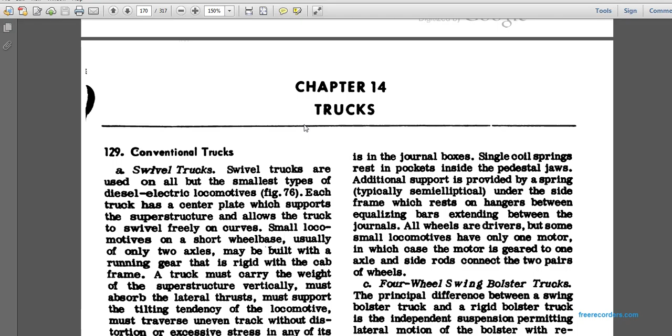129, conventional trucks. Swivel trucks are used on all but the smallest types of diesel electric locomotives. Each truck has a center plate, which supports the superstructure and allows the truck to swivel freely on curves. Small locomotives with a short wheel base usually only have two axles, may be built with a running gear that is rigid with the cab frame.

The truck must carry the weight of the superstructure vertically, must absorb the lateral thrust and support the tilting tendency of the locomotive. It must traverse uneven track without distortion, torsion, or excessive stress in any of the members, must carry the brake rigging, and must carry the electrically driven motors. Many different types of trucks have been designed to meet the great variety of conditions.

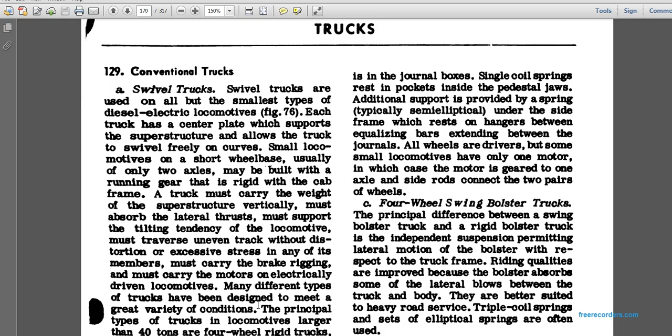The principal types of trucks for locomotives larger than 40 tons are the four-wheel rigid truck, the four-wheel swing bolster, and six-wheel swing bolster trucks. In all types, truck bolsters have the center bearing with a renewable plate that mates with the body bolster to carry the superstructure. Side bearings, with renewable wear plates mounted between the underframe and truck frame, limit the tilt of the superstructure.

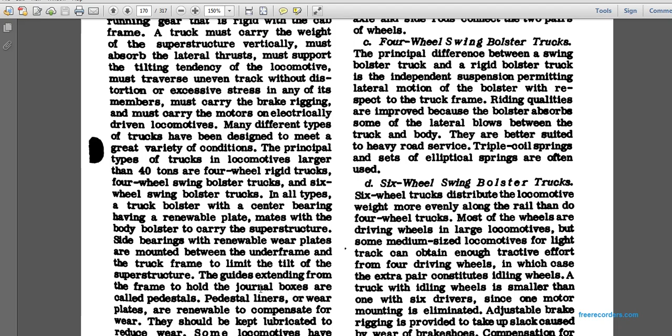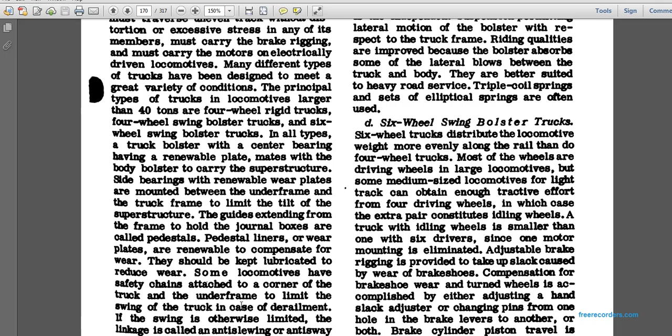The guide extensions of the frame that hold the journal boxes are called pedestals. Pedestal liners are renewable wear plates; they should be kept lubricated to reduce wear. Some locomotives have safety chains attached to the corner of the truck underframe to limit the swing of the truck in case of derailment. If the swing is otherwise limited by linkage, it is called an anti-slewing or anti-sway device. Other details are described below.

Four-wheel rigid bolster trucks. The bolster frames are cast together with the rigid bolster, with only lateral motion provisions in the journal box. Coil springs rest in pockets inside the pedestal jaws. Additional support is provided by typical semi-elliptical springs under the side of the frame, resting on hangers between the equalizers extending between the journals. All wheels are drivers, or some small locomotives have one motor, in which case the motor is geared to the axle and side rods connect the two pairs of wheels.

The four-wheel swing bolster truck. The principal difference between the swing bolster and the rigid bolster truck is independent suspension, permitting lateral motion of the bolster with respect to the truck frame. Riding qualities improve because the bolster absorbs the lateral blows between the truck and body. They are better suited to heavy road service. Triple coil spring sets or elliptical springs on the swing are often used.

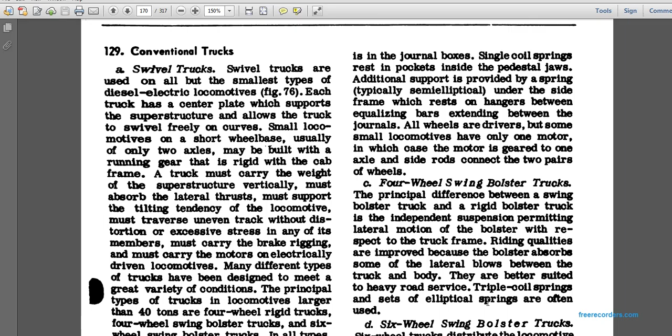Six-wheel swing bolster trucks. Six-wheel trucks distribute the locomotive weight more evenly along the rail than do four-wheel trucks. Most of the wheels are driven wheels in large locomotives, but in some middle-sized locomotives, enough tractive effort can be obtained from four driving wheels, in which case the extra pair constitutes idling wheels. Trucks with idling wheels are smaller than those with six drivers.

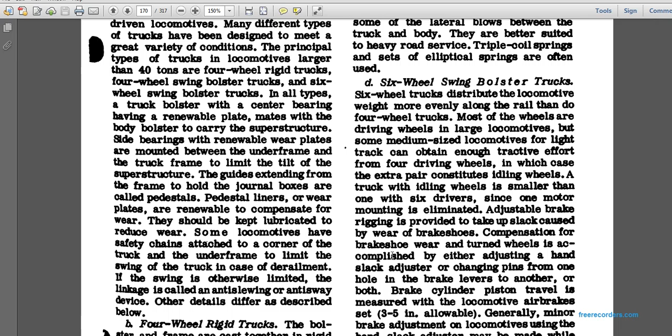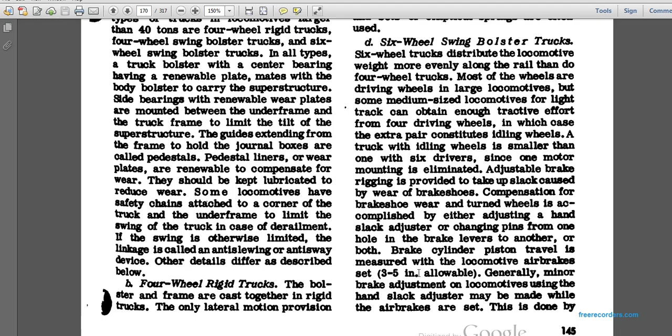since one motor mounting is eliminated. Adjustable brake rigging is provided to take up slack due to wear of brake shoes and wheels. This is accomplished by the hand slack adjuster or by changing the pins from one hole of the brake levers to the other, or both. Brake cylinder piston travel is measured with the locomotive air brakes set; 3 to 5 inches is allowable. General minor brake adjustments of locomotives using the hand brake slack adjuster may be made while air brakes are set.

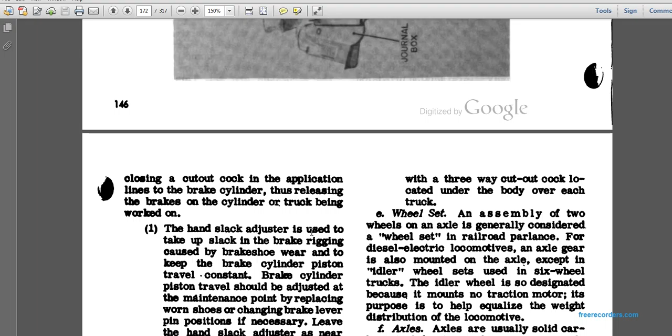This is done by closing the cutout cock in the application lines of the brake cylinder, thus releasing the brake cylinder on the truck being worked on. This right here is a truck. We're going to turn it around.

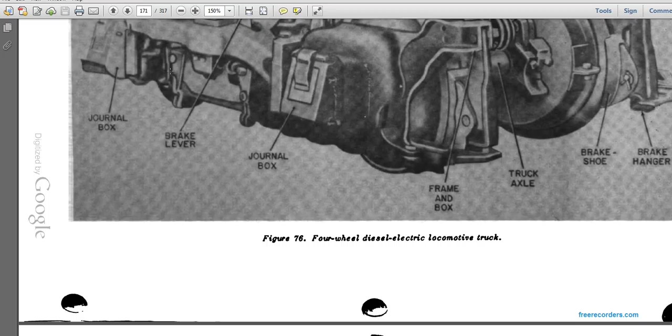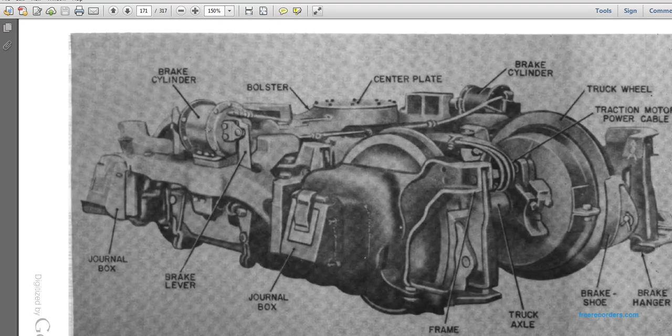This is a four-wheel diesel electric locomotive truck with the bolster, the center plate, and both brake cylinders on both sides, with a brake lever hooked up to the brake cylinder, rubbing against the truck wheel, and the traction motor power cable. You see the brake hanger and the brake shoe, with the brake cylinder pushing on the brake lever, while the truck axle, the frame and the journal boxes are still attached on there.

Adjusting the piston travel as near as possible means any adjustment needed in routine maintenance can then be made to the hand slack adjuster without necessarily changing the pins on the rods. The hand slack adjustment at the 8-inch travel allows adjustment as the brake shoes wear down, up to the condemning limit, while maintaining a 2-inch piston travel, as long as the pins and bushings are not badly worn.

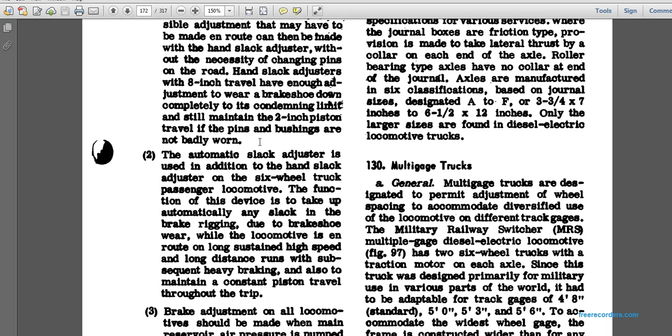The automatic slack adjuster is used in addition to the hand slack adjuster on the six-wheel truck passenger locomotive. The function of this device is to automatically take up slack in the brake rigging and shoe while the locomotive is in route, sustaining high speed, long distance travel with subsequent heavy braking. It also maintains constant piston travel throughout.

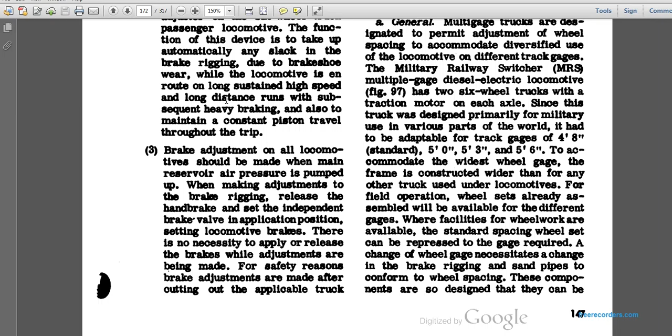Brake adjustment on all locomotives should be made with the main reservoir air pressure up, making the adjustment with the brake released, the handbrake off, and setting an independent brake valve application to set the locomotive brakes. There is no necessity to apply and release the brakes as adjustments are being made, for safety reasons. The brake adjustments are made for the cut-out of the applicable truck.

With the three-way cock located under the body over each truck. The wheel set, an assembly of the two wheels and axle, is generally considered the wheel set of the railway.

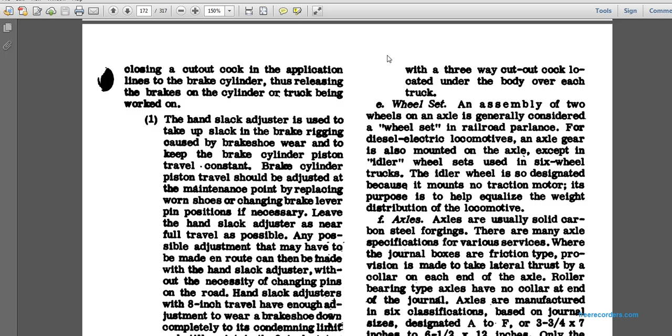For diesel electric locomotives. The axle gear is mounted on the axle, except in idler. This wheel set is used in six-wheel trucks. The idler wheel is designated because it is mounted without a traction motor, or mounted with no traction motor. Its purpose is to help equalize the weight distribution of the locomotive.

The axles are usually carbon steel forged, and axle specifications vary for various services where the journal box provides the friction type. The lateral thrust may be provided by a collar at each end of the axle. Roller bearing type axles have no collar at each end of the journal.

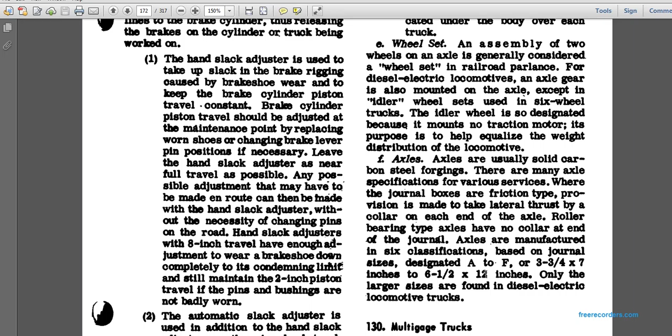Axles are manufactured in six classifications based on journal sizes, designated A through F, ranging from 3 and 3/4 by 7 inches up to 6.5 by 12 inches. Only the larger sizes are found in diesel electric locomotive trucks.

Multigage trucks. Generally, multigage trucks are designated to permit adjustment of the wheel spacing, accommodating diverse track gauges using the same locomotive on different track gauges.

The Military Railway Switcher, or multigage, diesel electric locomotive has two six-wheel trucks with traction motors on each axle. Since the truck was designated primarily for military use in various parts of the world, it had to be adaptable to different track gauges: 4 foot 8 inches, 5 foot, 5 foot 3 inches, and 5 foot 6 inches.

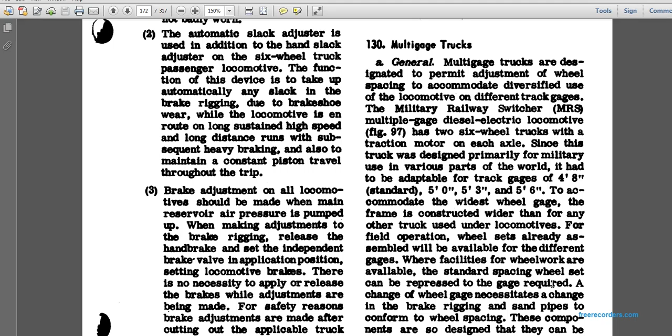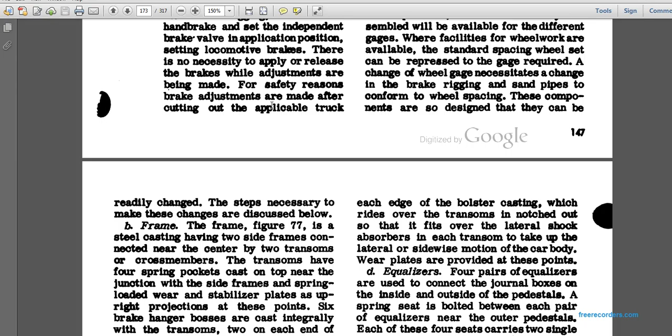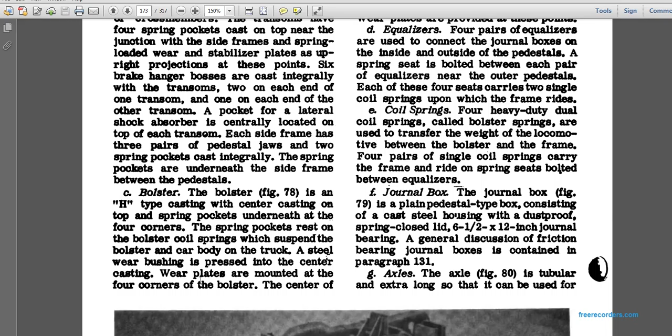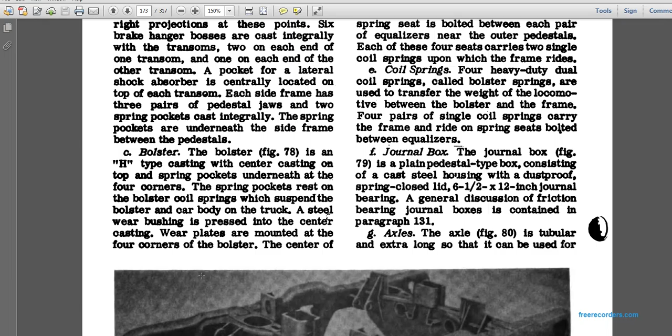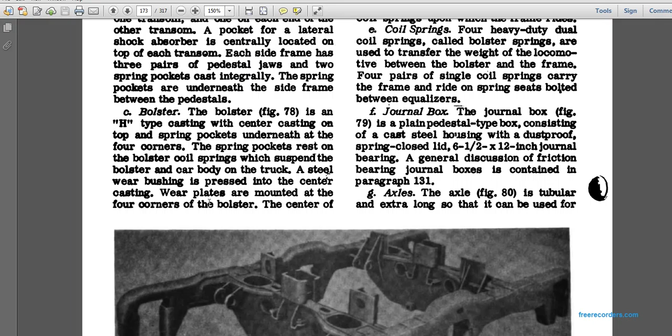A steel wear bushing is pressed in the center of the casting, Wear plates are mounted in the 4 corners of the bolster. This is a truck frame. It shows the side balusters and the center balusters. This is a 6-wheel truck frame.

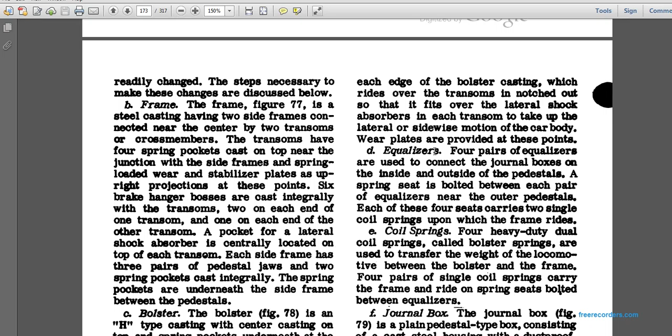The equalizers: 4 pairs of equalizers are connected with the journal boxes on each side, outside of the pedestal. A spring seat is bolted between each pair of equalizers at the outer pedestal. Each of the 4 seats carries 2 single coil springs on which the frame rides.

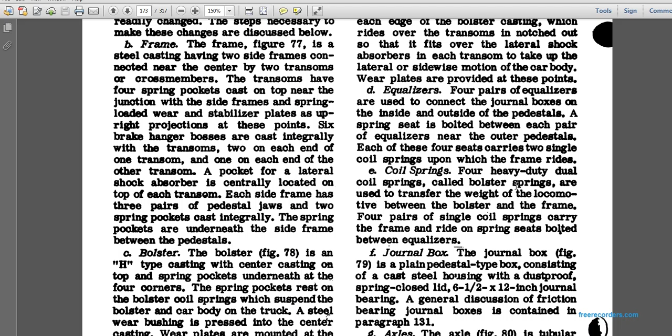The heavy-duty dual coil springs, called bolster springs, are used to transfer the weight of the locomotive between the bolster and the frame. The 4 pairs of single coil springs carry the frame, resting right on the spring seat bolted between the equalizers.

The journal box is a plain pedestal-type box consisting of a cast steel housing with a dustproof spring-closed lid, for 6.5 by 12 inch journal bearings. The general discussion of the friction bearing box is contained in paragraph 131.

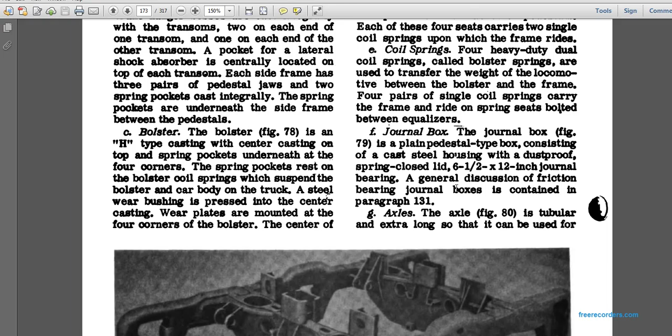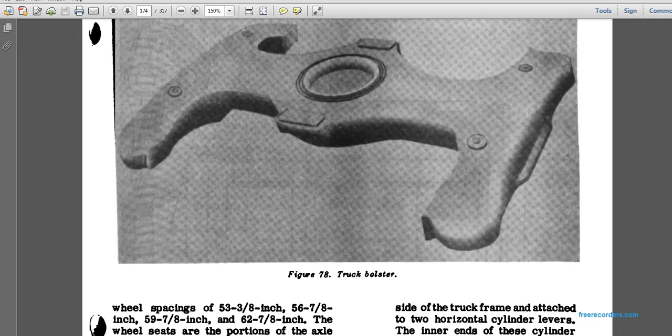Wheel spacing of 53 3/8 of an inch, or 56 7/8 of an inch, or 59 7/8 of an inch, or 62 7/8 of an inch — the wheel seat portion of the axle increases in length to allow the wheels to be pressed to different gauge widths.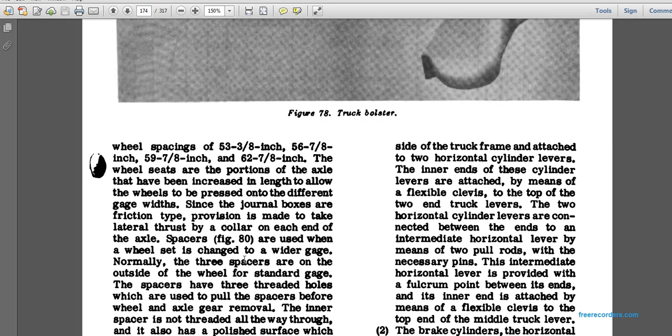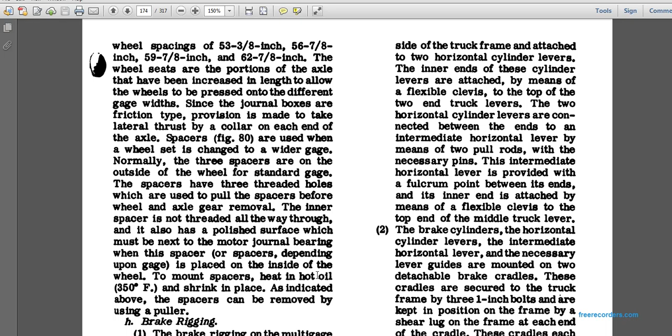The brake rigging is the multigage truck consisting of two 10 by 8-inch brake cylinders mounted on each side of the truck and attached to the two horizontal cylinder levers.

The inner end of the cylinder lever is attached by means of a flexible clevis to the top of the truck lever.

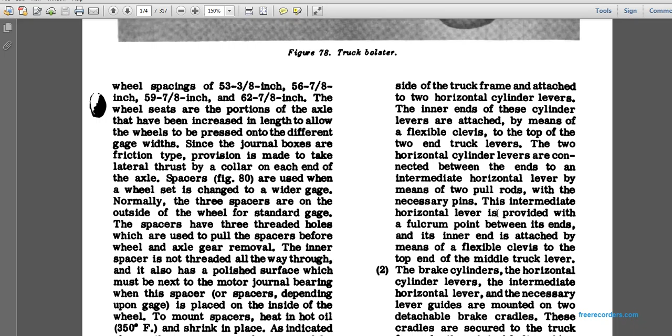The two horizontal cylinder levers are connected to the ends of the intermediate horizontal lever by means of two pull rods, with the necessary pins. The intermediate horizontal lever is provided with a fulcrum between the inner end of the cylinder, attached by means of the flexible clevis at the top, and the middle of the truck lever.

Necessary lever guides are mounted on the two detachable brake cradles. These cradles are secured to the truck frame with 3 1-inch bolts and are kept in position by the shear lug of the frame at each end of the cradle.

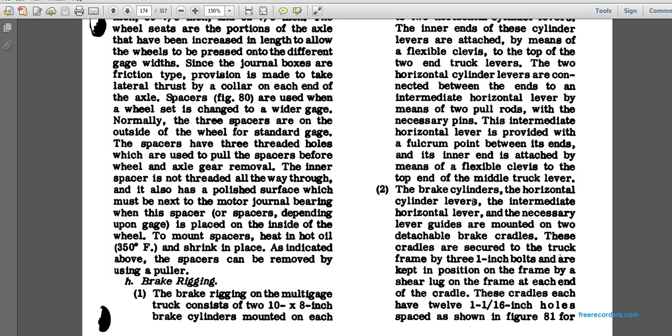These cradles have 12 holes of 1 1/16 of an inch spacing, as shown in Figure 81, illustrating the friction-type journal box.

The front cradle of figure 82, the rear cradle, the holes designated ABCD, shown in 81 and 82. The portion of the frame that supports each of the cradles is provided with 6 holes tapped with 1-inch bolts in the arrangement shown in figure 83. The frame under the rear cradle, the tapped holes designated 1, 2, shown in figure 83 and 84.

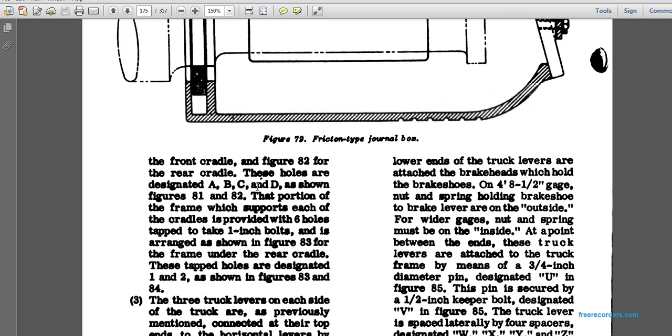The three truck levers on each side of the truck previously mentioned connect to the top end of the horizontal levers, the flexible clevis for the lower end of the truck levers attached with the brake head of the brake shoe, at 4 foot 8.5 inches of gauge, and nut spring holding the brake shoe brake lever to the outside of the wider gauge. The springs must be inside the point of the ends of these truck levers attached with the truck frame.

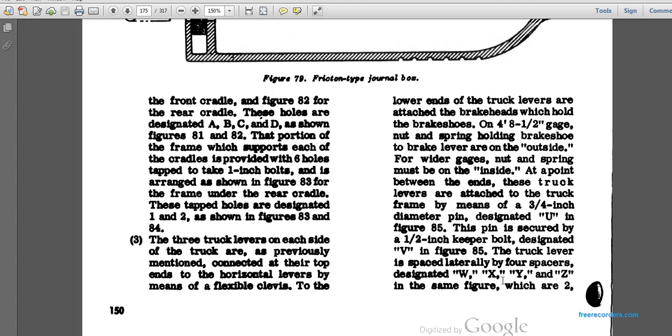By means of a 3/4 inch diameter pin designated with U in figure 85. The pin is secured with a 1/2-inch keeper bolt, designated V in figure 85. The truck lever is spaced laterally with 4 spacers, W, X, Y, and Z. The same figure, are 2.

Here you see the trucks and the wheel - the wheel axle assembly with the journal and the wheel and the journal case and the axle.

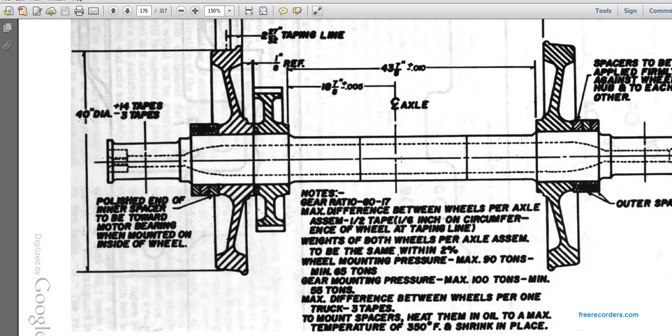Rear cradle, front cradle, frame of the cradle - talking about bolster. Or sorry, I don't know. Cradle - a couple different things cradle could mean, it could be a crib, I don't know, but we'll see.

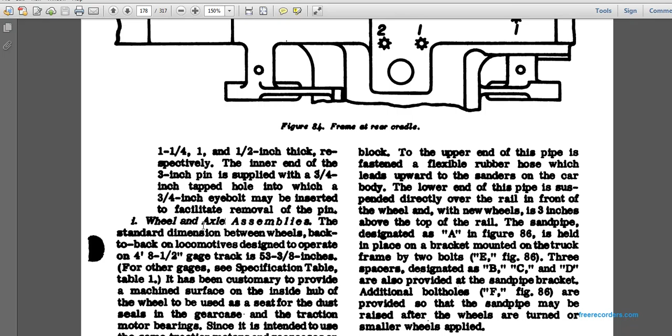The standard dimension between wheels, back-to-back on locomotives is designed to operate the 4 foot 8.5 inch gauge track, at 53 3/8 inches from the other gauge specification table, and customary to provide the machine surface inside the hub of the wheel, to be used to seat the dust seal of the gear case of the traction motor since it's intended with the same traction motor and gear cases.

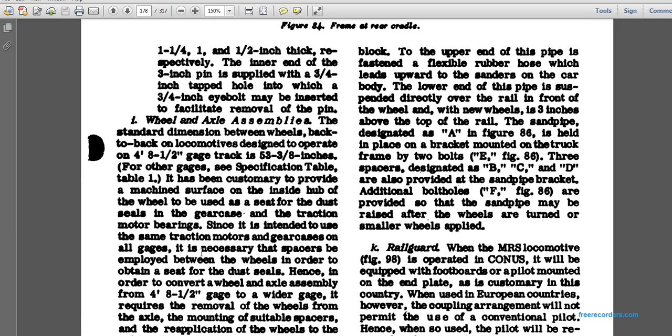All gauges necessary spacers are applied with the wheels in order to obtain a seat of the dust, and hence in order to convert the wheel axle assembly to 4 foot 8.5 inches wider, the gauge required to remove the wheel from the axle.

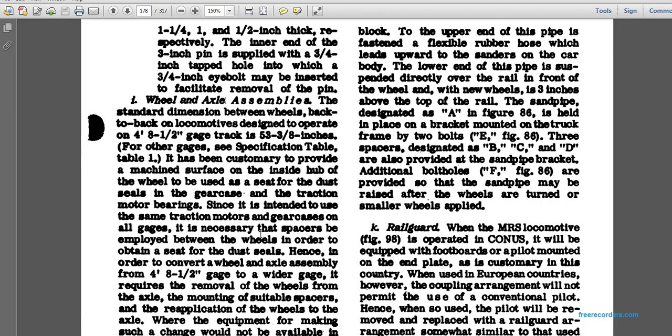The mounting of the suitable spacer, the reapplication of the wheels, the axles, the equipment for making the changes would not be available in the field and necessary to prepare the separate wheel. The axle assembly to complete the gear has suitable spacers for each gage, where the axle assembly part numbers are indicated in table 1.

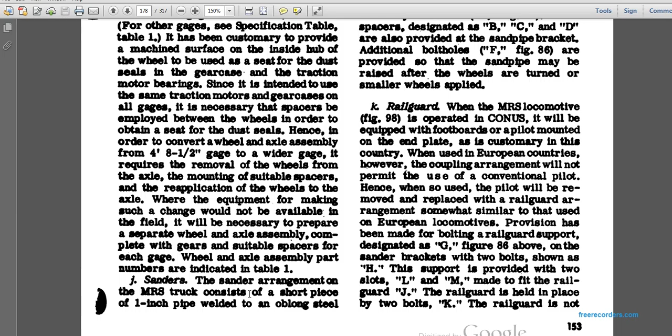Sander arrangement for the MRS truck consists of a short piece of 1 inch pipe welded, an oblong block at the upper end of the pipe, fastened with flexible rubber hose which leads upward to the sanders of the car body. The lower end of the pipe is suspended directly over the rail in front of the wheels and with new wheels, 3 inches above the top of the rail.

The sandpipe designated with A in figure 86, held in place by the bracket mounted to the truck frame by two bolts E in figure 86, and 3 spacers B, C, and D. They also provided at the sandpipe bracket. Additional bolt holes F are provided so the sand pipe may be raised after the wheels are turned or when smaller wheels are applied.

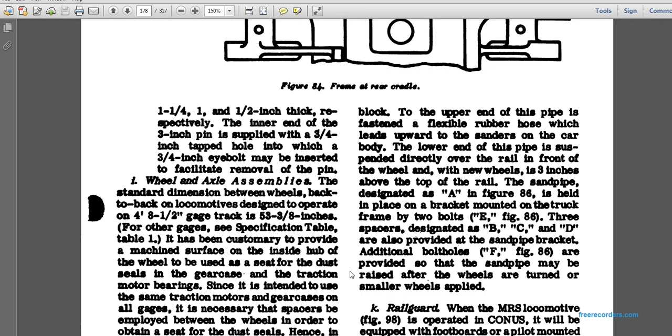K. Rail guard. When the MRS locomotive, figure 98, is operating in the CONUS, it will be equipped with footboards or a pilot mounted on the end plate, customary in this country. In European countries, however, the coupling arrangement will not permit the use of a conventional pilot. Hence, when used, the pilot will be removed and replaced with rail guards with an arrangement similar to those of

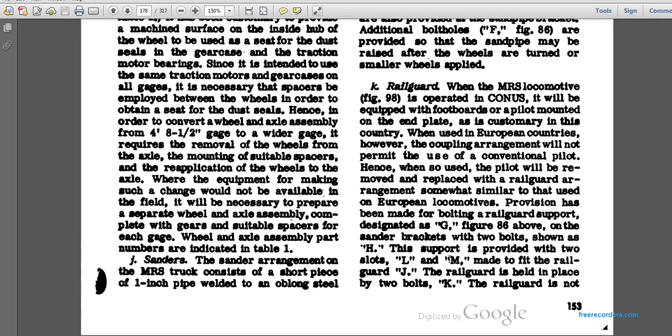the European locomotives. Provision has been made for bolting a rail guard support, designated G, figure 86, above on the sand bracket with the two bolts shown at H. The support is provided with the slots L and M to fit the rail guard J. The rail guard is held in place by two bolts K.

Gauge changing procedures, indicating the outline sequence of procedure for changing the gauge in the multiple gauge trucks. In all cases, in means towards the center line of the locomotive, and out means away from the center line. Procedures M8, 9, 10, and 11 below must be performed on both motor trucks. Change 4 foot 8.5 inches to 5 foot gauge.

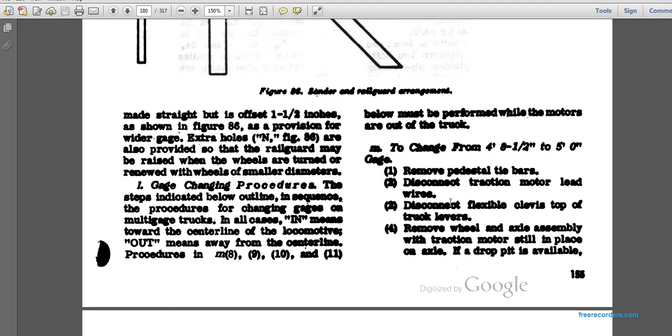Remove the pedestal tie bars. Disconnect the traction motor lead wires. Disconnect the flexible clevis at the top of the truck levers. Remove the end wheel and axle assembly with traction motor still in place on axle. If a drop pit is available, this may be accomplished by supporting the frame and equalizer while the motor and wheel and axle assembly is lowered out of the truck.

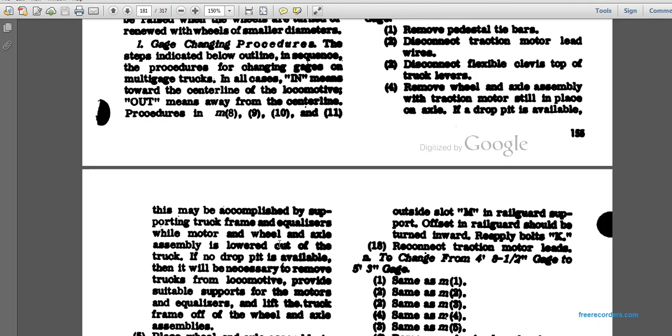If no drop pit is available, it will be necessary to remove the truck from the locomotive to provide suitable support for the motor and equalizer, and lift the truck frame off the wheel and axle assembly. Place the wheel and axle assembly in a suitable fixture to hold the motor. Remove the axle caps and the bearings.

6. Remove end wheel and axle assembly number 8175150, or center wheel and axle assembly number 8182772 from the motor, and replace with end wheel and axle assembly number 8175151, or center wheel and axle number 8182774. Replace the bearings and the bearing caps.

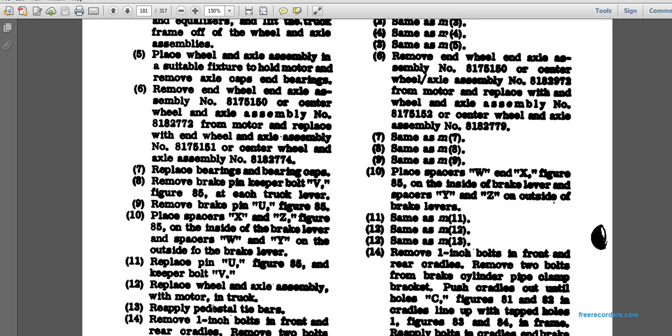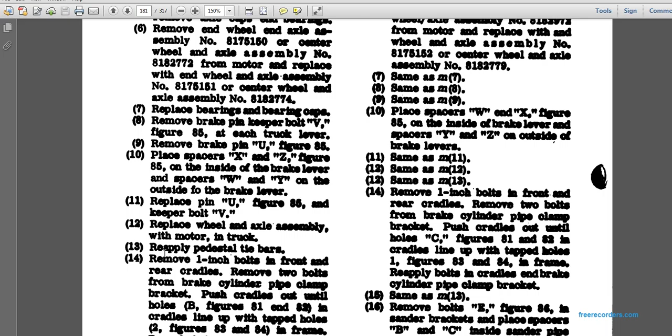Reapply the pedestal tie bars. Remove the 1 inch bolts in the front and rear cradles. Remove the two bolts of the brake cylinders, the pipe clamp bracket, the pump. Push the cradles out until the holes, figures 81 and 82, in the cradles line up with the tapped holes, figures 83 and 84, in the frame. Reapply the bolts in cradles, brake cylinder and pipe clamp bracket. 15. Connect flexible clevises between the truck levers and horizontal levers.

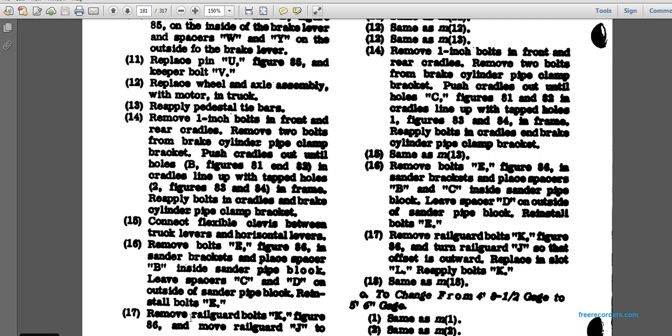Remove the bolt E, figure 86, in the sander brackets, and place the spacers B inside the sander pipe block. Leave spacers C and D on the outside of the sander pipe block. Then reinstall the bolt E. Remove the rail guard bolts K, figure 86. Move the rail guard J to the outside slot M of the rail guard support, offset the rail guard supports, and reapply the bolts K. 18. Reconnect the traction motor leads.

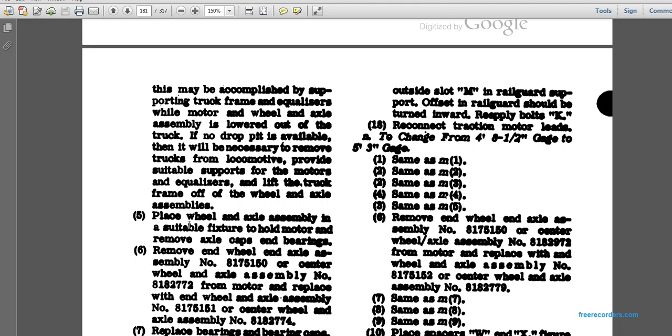To change from 4 foot 8.5 inch gauge to 5 foot 3 inch gauge: M1 through M5, same as above. Remove the end wheel and axle assembly number 8175150, or wheel and axle assembly number 8182972, from the motor. Replace with wheel and axle assembly number 8175152, or center wheel and axle assembly number 8182779. Same as M8 and M9.

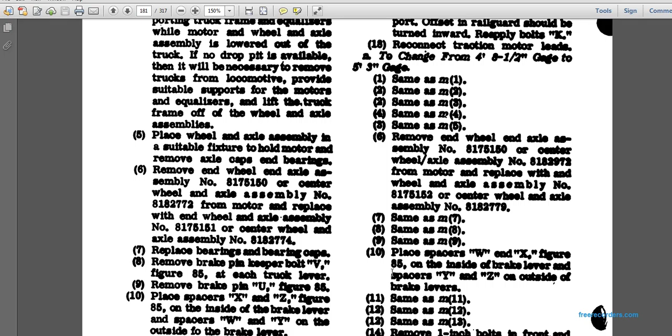Place spacers W and X, figure 85, on the inside of the brake lever, and spacers Y and Z on the outside of the brake levers.

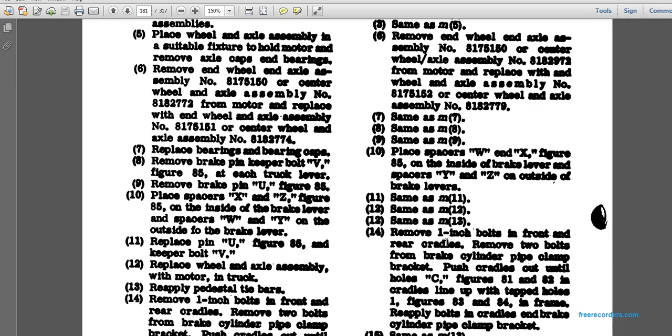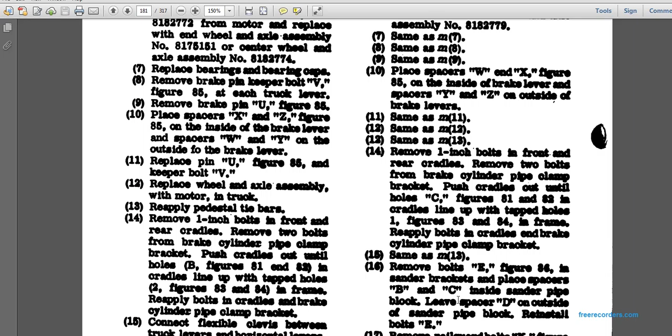Reapply the bolts in the cradle brake cylinder pipe, clamp of the brake, and same as the M13. Remove the bolts E. Figure 86. Place spacers B and C inside of the sander pipe block. Leave spacer D outside of the sander pipe block and reinstall the bolt E. Remove the rail guard bolt K and turn the rail guard J so that the offset is outward and replace slot L with reapplied bolt K.

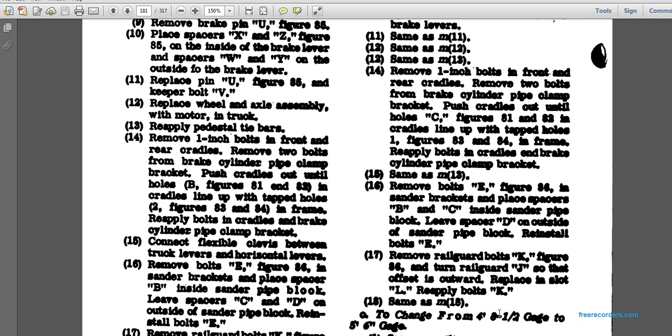Same as M18 to change from 4 feet 8 1/2 gauge to 5 feet 6 gauge, same as M1 through M5. Remove the end wheel and axle assembly number 8175150, center wheel axle assembly 8182772 from motor, and replace with the end wheel axle assembly number 8175153 or center wheel and axle number 8182778. M7 through M9 is the same.

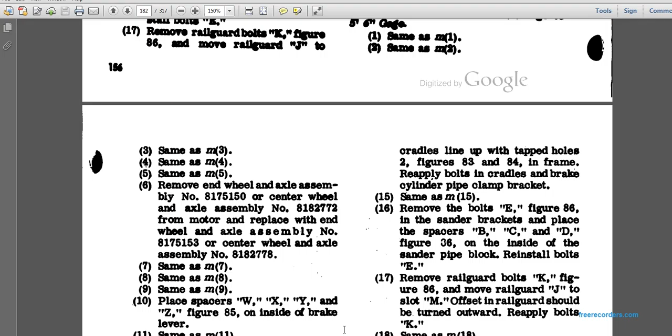Spacers W, X, Y, and Z inside the brake lever. M11 through M13 are the same. Remove the 1-inch bolt in the front and rear cradle and the 2 bolts of the brake cylinder pipe. Push the cradles until C, figures 81 and 82. Cradles are lined up with the tapped holes, figures 83 and 84, in the frame. Reapply the bolts of the cradle and the cylinder pipe clamp bracket, same as M15.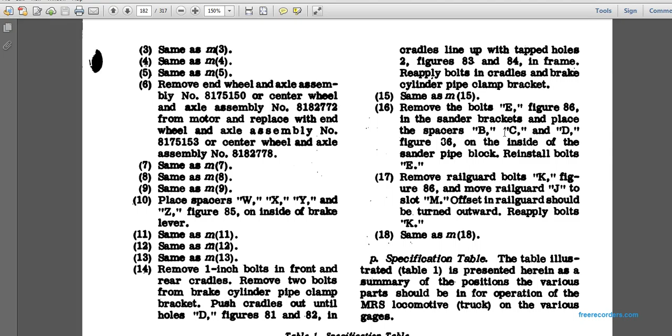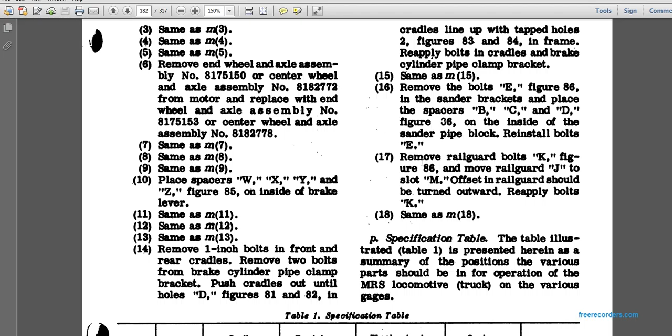Remove the bolt E in figure 86 of the sander bracket. Place the spacers B, C, and D, figure 36, inside the sander pipe block and reinstall the bolts E. Remove the bolts K, figure 86, and remove the guard J, and turn it outward to reapply bolts in K. Same as M18.

Specification tables illustrated in Table 1 are presented here in the summary. The position of the various parts should be in operation of the MRS locomotive truck for various gauges. You see the 4 foot 8 1/2 inch gauge, the 5 foot 3 inch and 5 foot 6 inch gauge. It tells you where the wheel spacing is, the cradle hole and its letter, and how many holes are in frames.

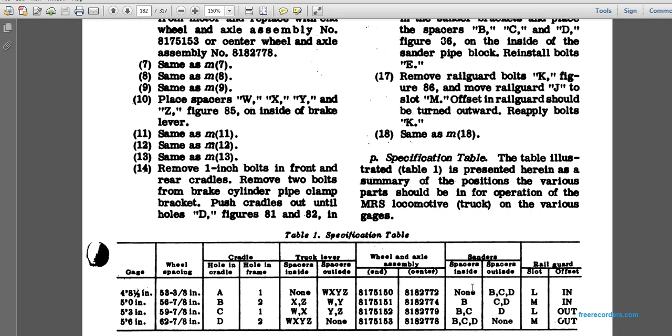The spacers inside, W, X, Y, and Z, if they're all included, or just W, X, or X, Z, or none, and then flipped around to the spacers outside, W, X, Y, and Z. And then W, Y, Z. The wheel assembly numbers, end and center. The spacers outside and inside, and the rail guard, slotted and offset.

The frame tie bar across the lower end of the pedestal serves as the reinforcement of the pedestal and prevents the journal box from dropping out of the pedestal in case of derailment. The wedge forms the solid contact between the box and the bearing. It is easily inserted to remove the journal bearing. The bronze-backed babbitt solid type bearing rides on the top of the axle journal with the radius turned toward the wheel.

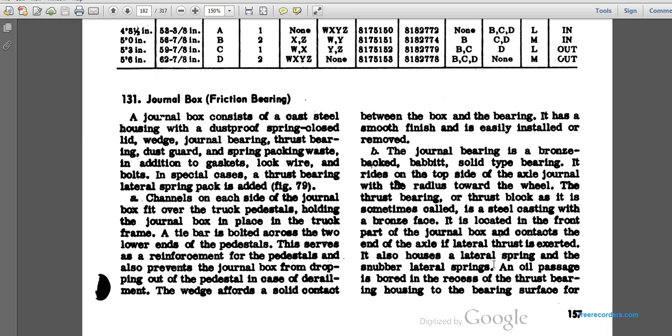The thrust bearing, sometimes called the thrust block, is a steel casting with a bronze face, located in the front part of the journal box. It contacts the end of the axle and takes the lateral thrust exerted by the lateral springs. Oil passages are recessed in the thrust bearing housing, and the bearing surface lubrication is supplied by oil-soaked cotton and wool waste or mechanical lubricating devices.

The dust guard fits in the slot at the back end of the journal box. The journal box is assembled with the axle journal. The dust guard fits on the axle shoulder near the wheel to prevent the oil from leaking out of the box. It also prevents dust and water from entering the box.

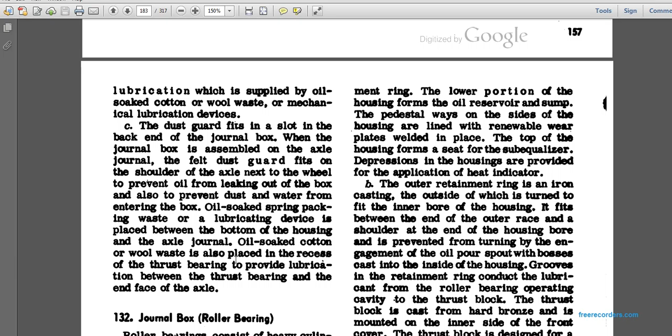Oil-soaked spring packing waste and a lubricating device are placed at the bottom of the housing and axle. Oil-soaked cotton wool waste is placed in the recess of the thrust bearing, providing lubrication between the thrust bearing face and the face of the axle.

Okay, 132, journal box roller bearing. Roller bearings consist of heavy cylindrical inner and outer races. The two rows of large diameter solid rollers and races are fabricated of hardened alloy steel. The inner race is shrunk on the axle journal. The wheels may be removed without disturbing the inner race.

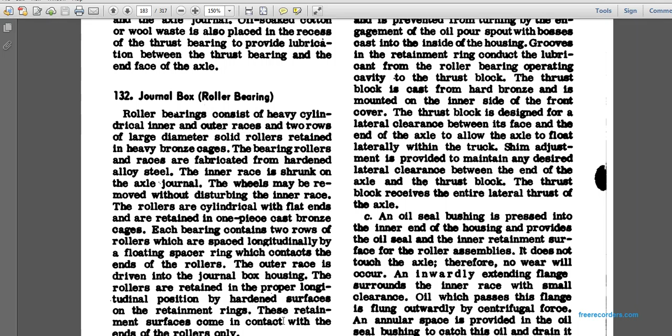The rollers are cylindrical and flat ended, retained in a one-piece bronze cage for each row. Each bearing contains two rows of rollers and a floating spacer ring contacting the rollers and the outer races in the journal box. The rollers are retained in the proper longitudinal position by hardened retaining surfaces. The retaining ring surfaces contact the ends of the rollers only.

The journal boxes may be fitted with plain covers. Plain covers are for boxes with no auxiliary attachments, whereas combination covers are fitted with attachments such as speed indicator drives, braking speed generators, overspeed controls, and similar devices.

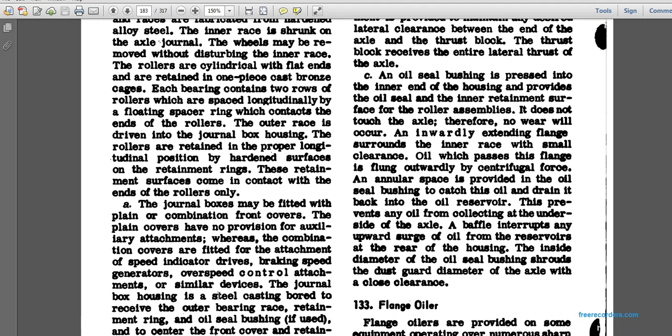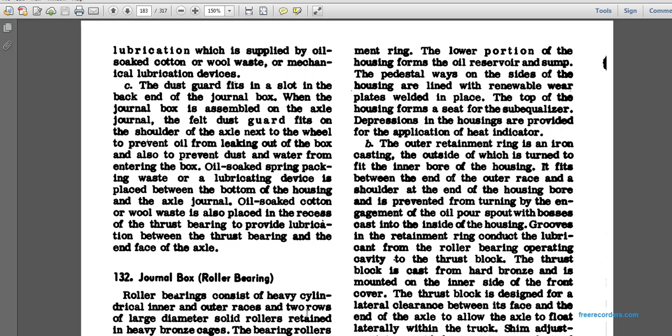the heat indicator. The outer retainment ring is an iron casting, the outside of which is turned to fit the inner bore of the housing. It fits between the end of the outer race and the shoulder at the end of the housing bore, and is grooved for engagement of the oil spout of the boss cast inside the housing, conducting lubrication to the roller bearing and the operating cavity of the

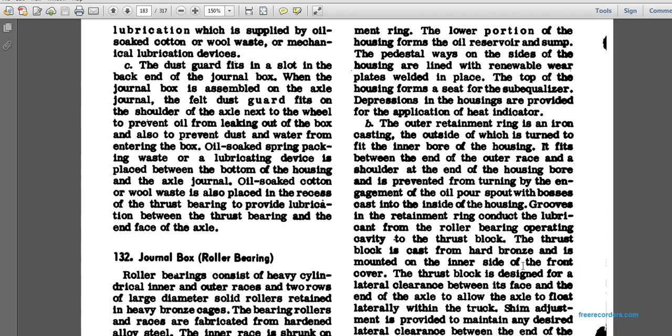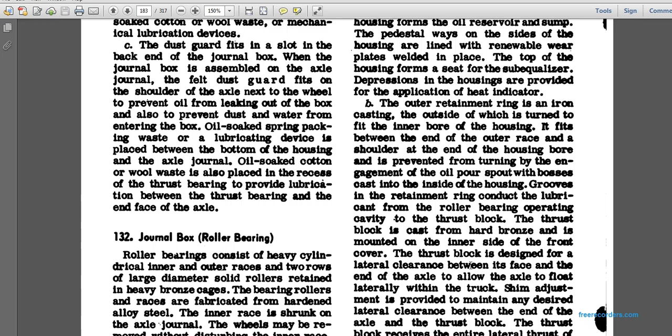thrust block. The thrust block is a hard bronze casting mounted on the inner side of the front cover. The thrust block is designed for lateral clearance between its face and the end of the axle to allow the axle to float laterally within the truck. Shim adjustment is provided to maintain any desired lateral clearance between the end of the axle and the thrust block. The thrust block receives the entire lateral thrust of the axle.

An oil seal bushing pressed into the inner housing provides the oil seal. The inner retaining ring of the roller assembly does not touch the axle; an inward extending flange surrounds the inner race. Oil on these surfaces is flung outward by centrifugal force. Annular spaces in the oil seal bushing catch the oil and drain it back to the oil reservoir.

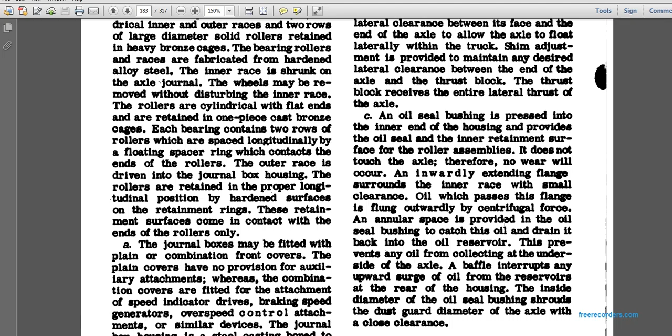A baffle prevents the oil from collecting on the underside and interrupts the upward surge of oil from the reservoir. At the rear of the housing, the inside diameter of the oil seal bushing shrouds the dust guard diameter of the axle with a close clearance. 133, the flange oiler.

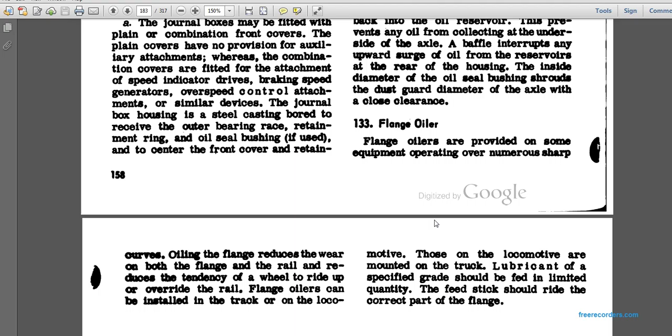The flange oiler is provided on some equipment operating over a number of sharp curves. Flange oiling reduces wear on both the flange and the rail and reduces the tendency of the wheel to ride up or override the rail. Flange oilers can be installed on the track or on the locomotive. Lubricant of the specified grade should be fed in limited quantity. The feed stick should ride on the correct part of the flange.

Part 5. Operation: Diesel Electric Locomotives Operating Instructions.